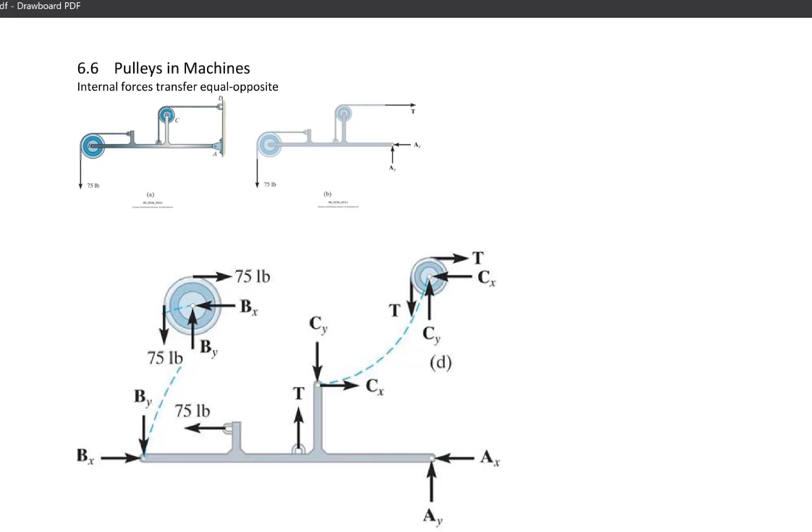So the takeaway here is that for pulleys to be in equilibrium, they have to have forces at the shaft. The shaft then has to transfer equal opposite to the main frame.

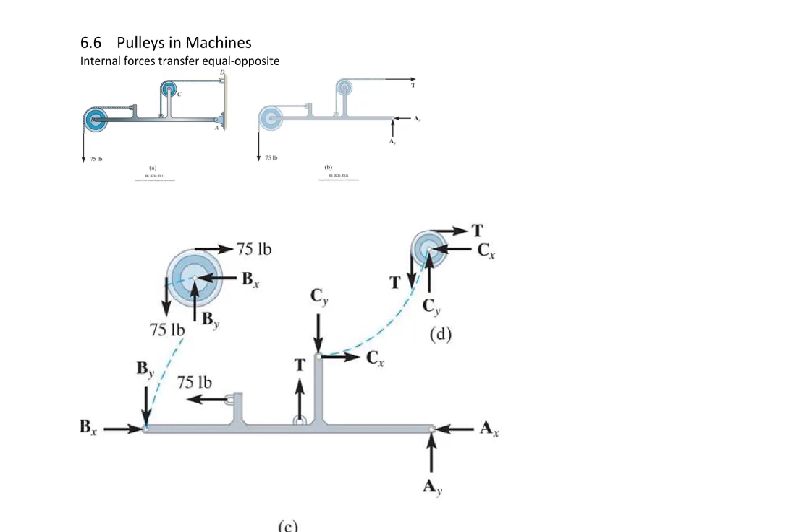So in this example problem, we have this weight hanging down. It's obviously putting a tension here. That tension is the same going that way. There's a two-force member here, and our desire is to find the reactions at A and at C.

All right, so what can we do? We can separate the pulley, just like that. We know what this tension is because we know what the weight is. We know that forces have to transfer equal opposite so that they stay in equilibrium. You can determine the forces in the shaft by drawing them in there, and then you can sum the forces in X and Y to discover them.

But these forces have to transfer equal opposite to the end part of this member. The two-force member is in horizontal orientation. It looks like we've drawn it as a tension member pulling away from the joints of the two-force member. Therefore, it's pulling away where it attaches like that. We got a pin connection down here, and so therefore we have a free body diagram, or a set of free body diagrams here, which can help us analyze the thing.

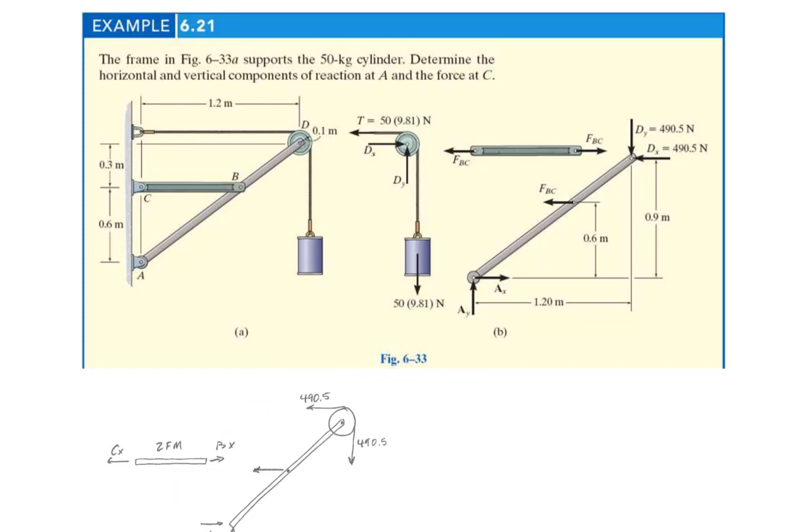Now here's the option for you. You can take the pulley apart from the frame, or you can leave it attached. And here I have a free body diagram of the pulley where it stays attached. In other words, we have a free body diagram of this part like that. We still have a tension over here, and we still have a tension going back.

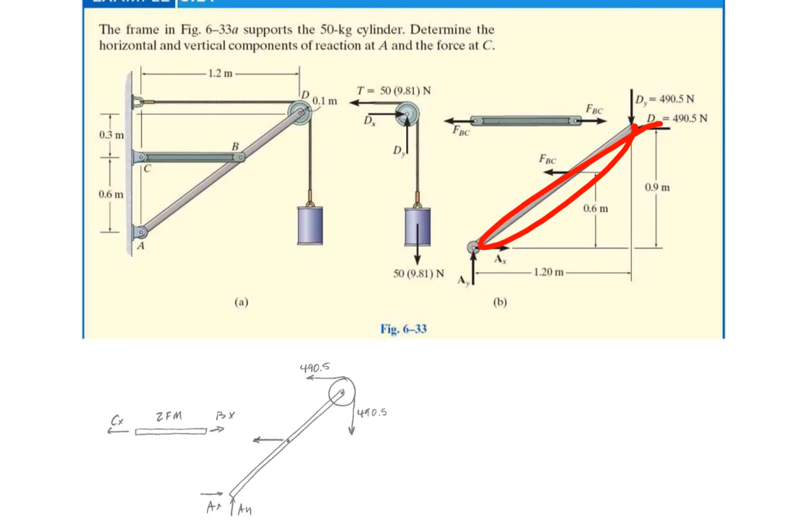The reason this is equivalent is because the lever arms are increased just a little bit by the radius of the pulley, but it's increased on both sides. So indeed, if you did the sum of the forces of this versus this, you'd get the same. If you did moments of this versus this, you'd get the same answer. So these are equivalent descriptions, and for your convenience, you may choose to take the pulley off of the shaft and draw it like this, or you may include the pulleys together.

So let's walk through this problem 6-70. It's a similar kind of thing where there's a force being applied here, and there's going to be some reactions. There are no two-force members here, but let's go ahead and draw the forces on the picture. So I'll say this is going to be AY, AX, BY, and BX.

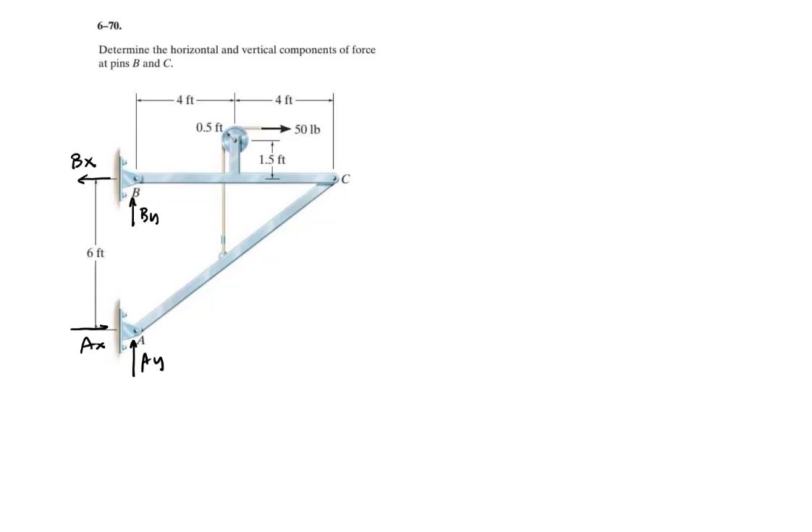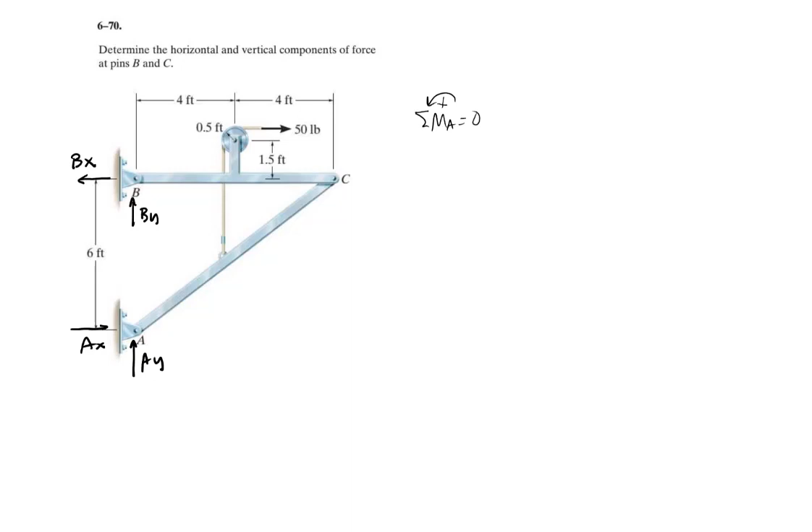Okay, can I solve for any reactions before breaking it apart? Let's try: sum of the moments about A equals 0. What have I got about A? Well, about A, I have BX and that. So let's go ahead and write those in. I got BX times 6 minus 50 times 8 equals 0. So BX is equal to

66.7 pounds. Then, taking the structure together, sum of the forces in the x is equal to 0. Got minus BX plus AX plus 50 is equal to 0. So AX is equal to 16.7 pounds. All right, so I've got two components of the reaction, those two x components. I cannot solve for the y components, however. There's no way to get those without breaking it apart.

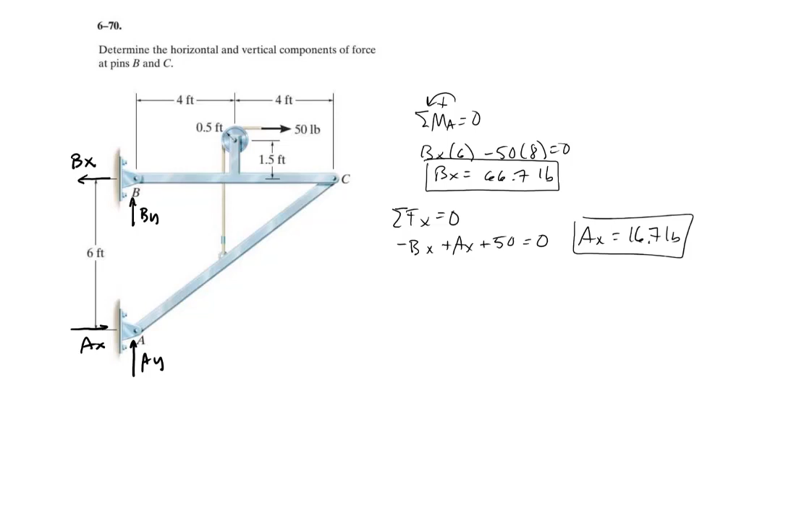So let's break it apart. For this example, I'm going to take the pulley off of the standard there. So I'm going to say that this is 50 and this is 50, meaning this has got to be 50, and that one's going to be 50 — it can't be anything different from that. And it didn't even give a letter here, so what did I call this? I think I'm going to call that point D. So I'll say that is DX, and that's equal to DY.

Now let's draw a free body diagram of this portion right here and see what we get. All right, so here I have BX and BY. I'm going to transfer DX and DY equal and opposite. So I have 50 going up on there, which means it's going down on the pin here. And then I have 50 going this way. Then at the end here I have CY and CX.

Okay, can I find out anything here? Well, let's try. I'm going to sum the moments about B. Sum of the moments about B is equal to 0, so I got minus 50 times 4, minus 50 times 1.5 — those are these two, that times this lever arm, and that times this lever arm. Then I got plus CY times 8. That's equal to 0, so I can solve that for CY, which is equal to 34.38

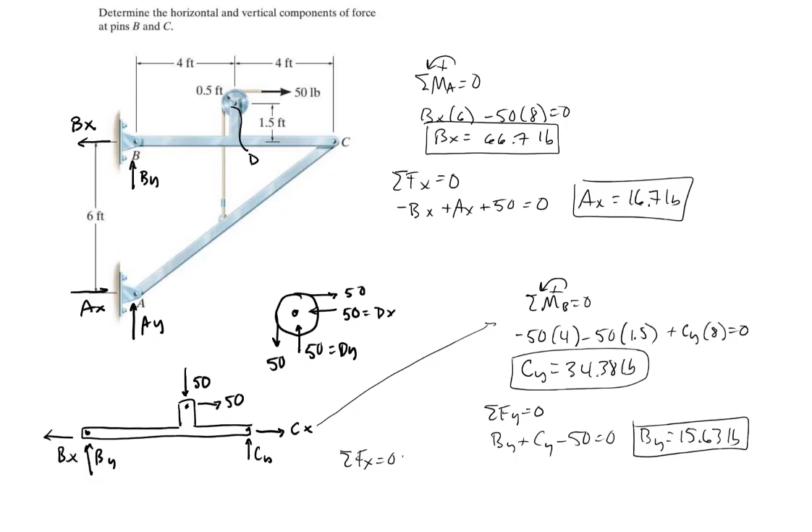And can I find out anything else? How about sum of the forces in the x? I think I can get there. All right, what have I got here? I've got minus BX plus 50 plus CX is equal to 0. And that gets me CX is equal to 16.67.

All right, have I got all of the parts? I actually don't think I've solved for AY yet. So can I go back to the top, considering this whole thing, and sum the forces in the y? Let's go back up to here and see what I can find. Sum of the forces in the y is equal to 0. So I got BY plus AY. Is that all I have? BY plus AY is equal to 0. Therefore, AY is equal to negative 15.63. Okay, so now I've solved for all of the pieces of the puzzle.

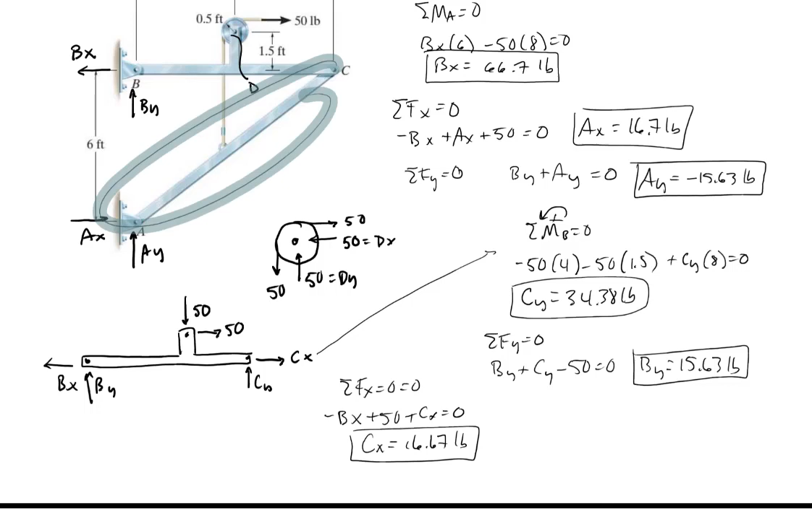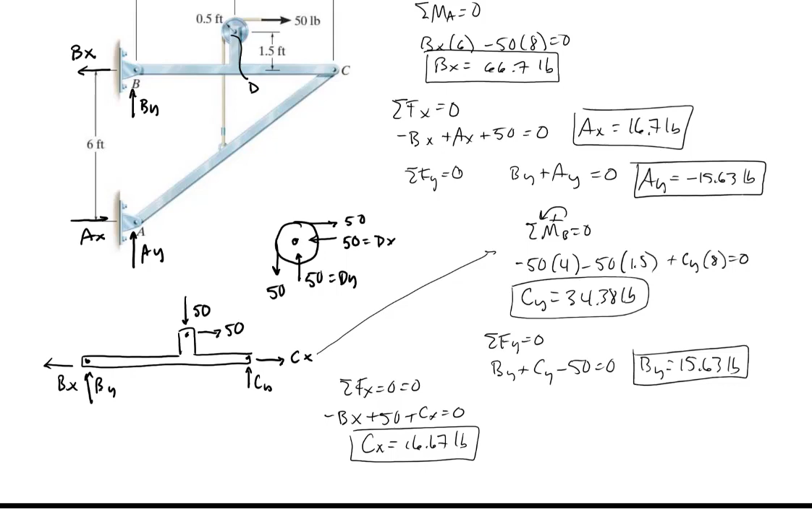I didn't actually even have to go here and try to solve anything — I could have, that would have been an appropriate way of doing it. But let's just draw the free body diagram. I don't really have room here, so I'll do it right up here, zooming out a little bit. If you drew the free body diagram of that part of the shaft, you would have to include that 50 going up, and then the other parts have to be transferred equal and opposite. So I'm going to say there's a CY and a CX, and then we can put AY and AX the way they were drawn originally.

You can do analysis on that free body diagram and should get the same result. I think the textbook's solution does it that way, but I'd have to go back and check. At any rate, make sure you put that 50 in the correct spot, because that spot has to match for the lever arms. If this is 4 feet and this is a half, then this distance here would be 3.5 feet. I should put that on here for reference in case you run into a similar problem.

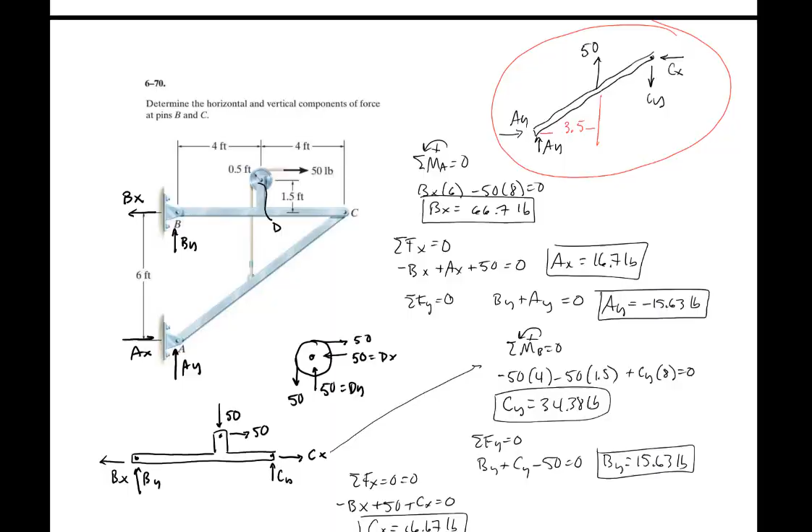This last problem is similar in that you have a force pulling down here, with a tension here and a tension here. Again, you can model it two ways: either take these tensions and transfer them to this shaft or pin, or call this an external force and this an external force, keeping it at the top of the radius of the pulley. So for purposes of comparison, I modeled it this way.

So I'm going to sum the moments about A here. I have 1T with this lever arm and negative T times this lever arm, which are those T's. Then I have this other tension right here, which is T times 0.85, going in the positive direction. In other words, there are 3 T's associated with this if you take the pulley off.

I guess that's kind of the point: if you take the pulley off and transfer things to the pin, you still have to consider that the tension here is part of the free body diagram. So those are the 3 T's, then I still have the P going down, and I can find some relationship here.

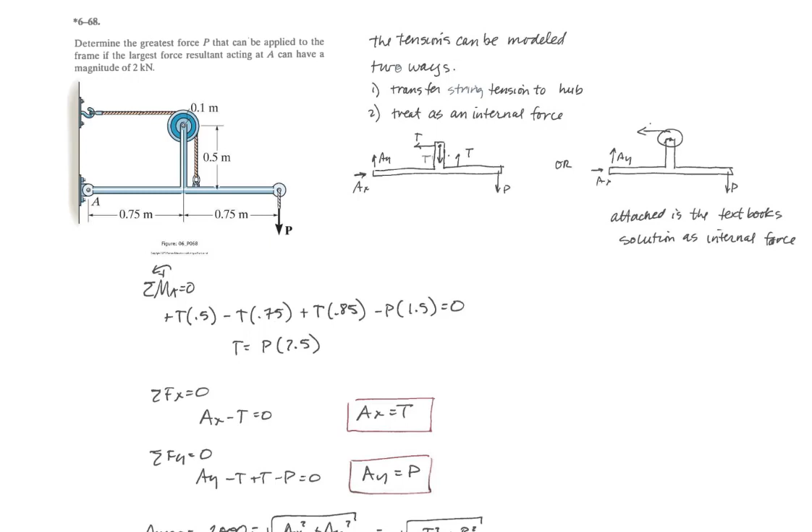We're trying to find the largest force that can act so that the magnitude of the reaction at A does not exceed 2,000 newtons. So here I have some relationships, some forces in the X, some in the Y. My limiting factor is that the magnitude of the resultant at A equals 2,000, which is the square root of the sum of the squares.

I have solved for AY and AX in terms of T and P, so that's the square root of T squared plus P squared. And I know what the tensions were, so I just plug those in and solve this for P, which comes out to 742.

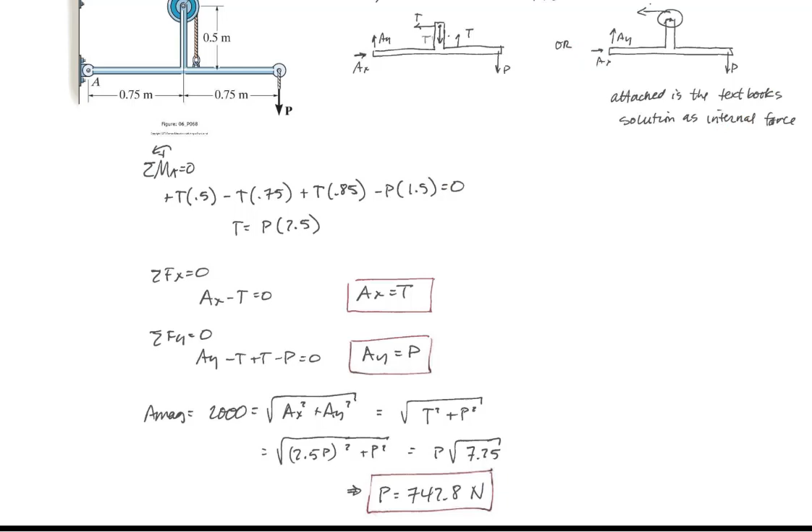So what I want to show you is the textbook solution for doing it this way, and you can choose whether you think this is easier or that is easier. This one is actually probably easier because you don't have so many attachment points — you just keep this as an external force, don't have to include that internal force, and you get the same answer.

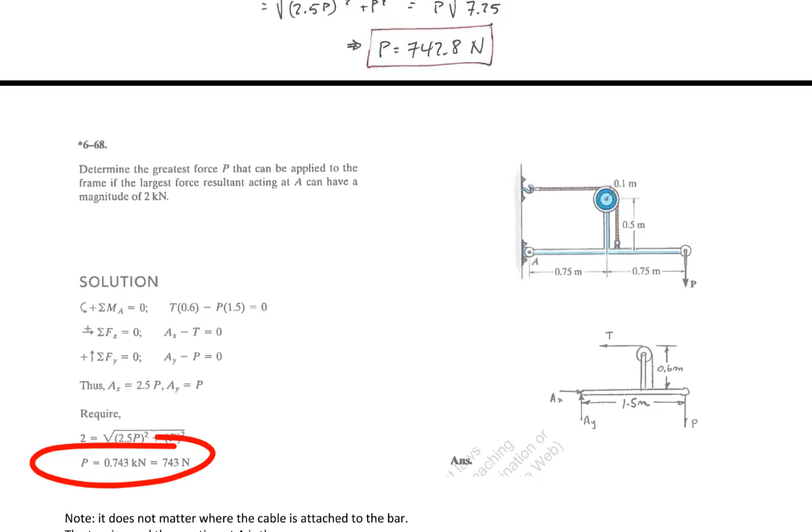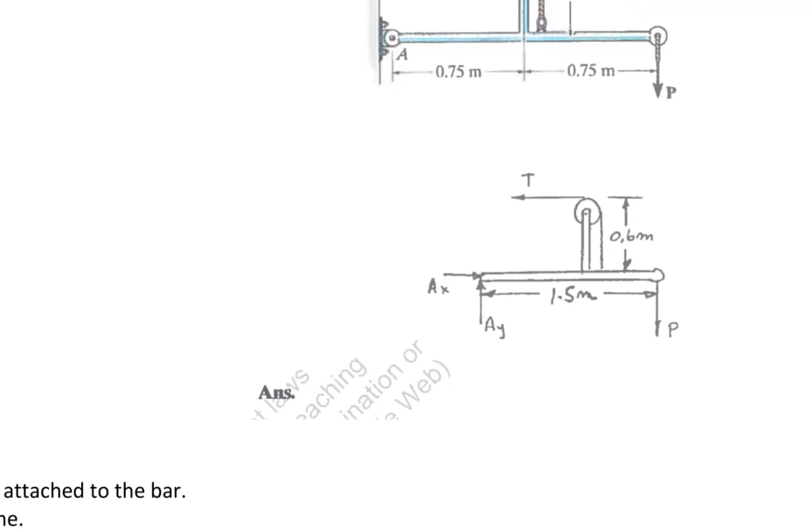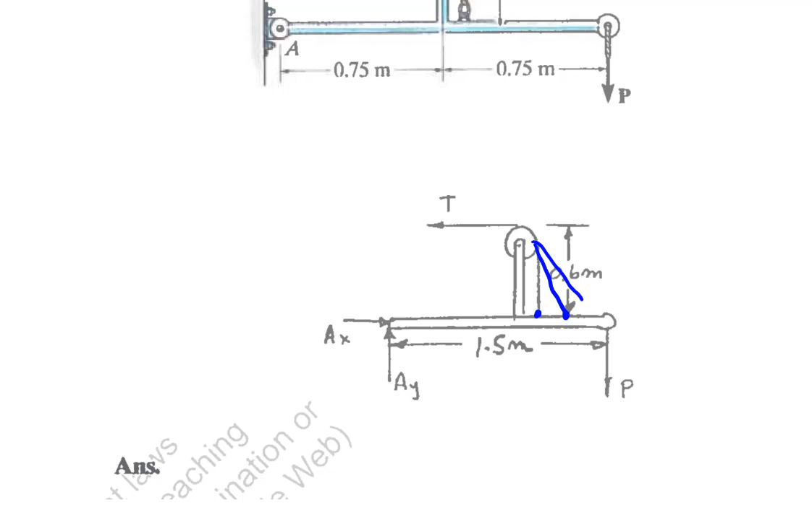Now here's something quite curious. If you consider modeling it this way, let me zoom in here — here's my free body diagram. Does it matter where this is attached? In other words, could you attach it here and get the same answer? Or here? Or here? In other words, it does not matter where you attach this force.

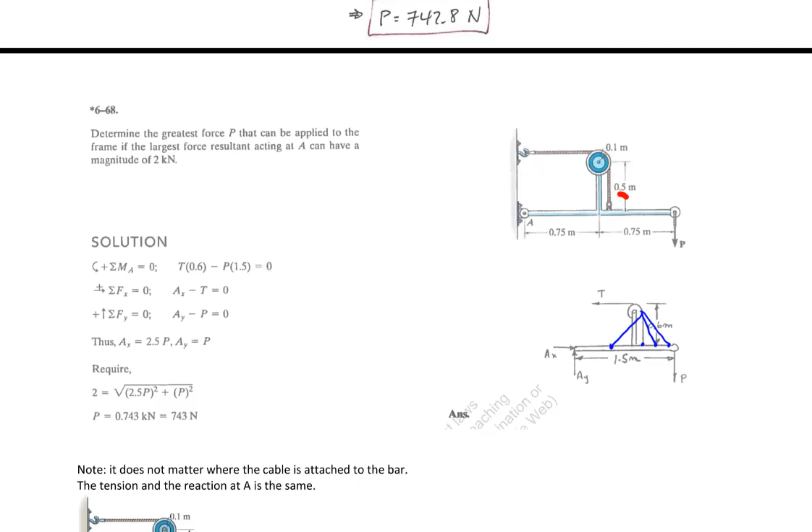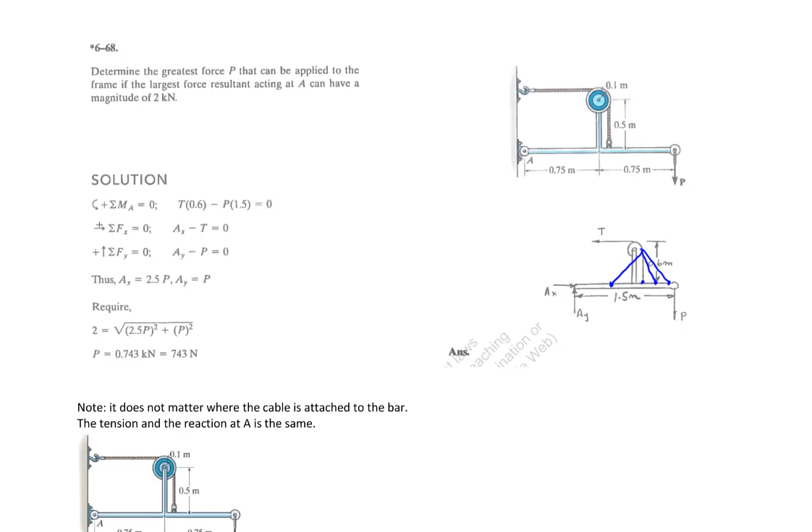Either way you do the problem, it's easiest to see here that this is an internal force — it doesn't matter where you put it. It doesn't change the tension, regardless of where you attach it. So walk through that logic and convince yourself it doesn't matter where you attach it to still get the same tension. I'll try to design a homework problem and give one of those to you for your consideration.